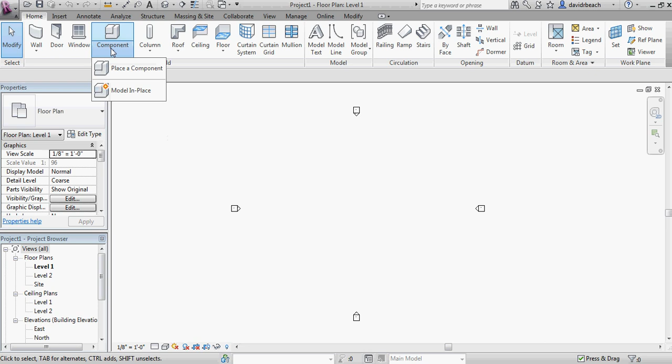Let's just dive into creating a student project that I know about. Rich, this one is for you, buddy. So we're going to start with the component tools, and we're going to go model in place. To start off with, as you're getting comfortable with Revit, let's stick with the generic models, and I'm just going to call this Rich 1.

The first thing that I'm going to do is drop a reference plane, because I'm going to start by actually working off of the foundation on Rich's project. And I'm going to name that reference plane, so I have it selected, and I'm going to name it Foundation.

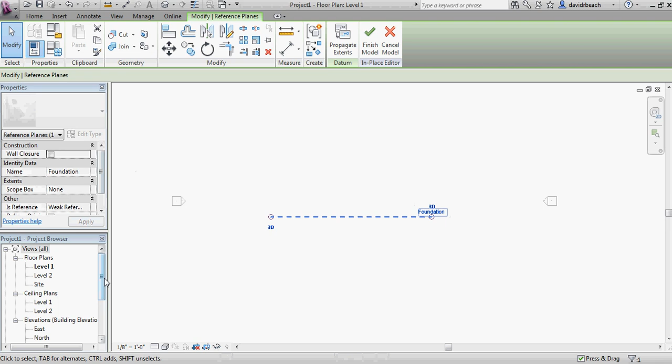You can see that the foundation, as that's clicked, will show up right here. So I'm going to go to my south view, and I'm going to go to Home, Extrusion, and now I'm going to choose the reference plane foundation to begin my sketch.

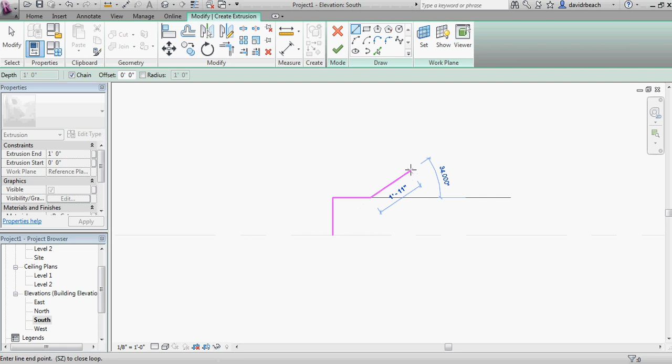So I'm going to go up 18 inches. I'm going to go over 18 inches. I'm going to create a 45-degree angle slope. Let's go a little less than that. Let's do 35. That seems better. 35. Let's make that 2 feet.

I'm going to come down to match that angle. Let's do something like that. And then close this object off and accept it. And in 3D, I'm going to go ahead and pull that out to, let's do 100 feet to start with.

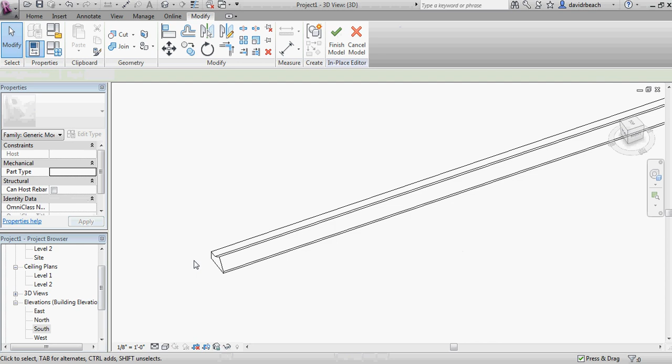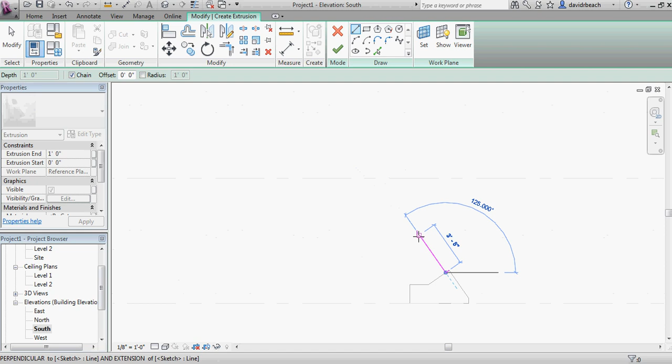So I'm going to go back to the south view again, and let's continue working in that reference plane. This time I'm going to go ahead and make the structural column. Again, I'm going to choose the foundation reference plane. I want to come in about 4 inches from the top. Just need to remember to delete that line later. Let's bring this up 26 feet.

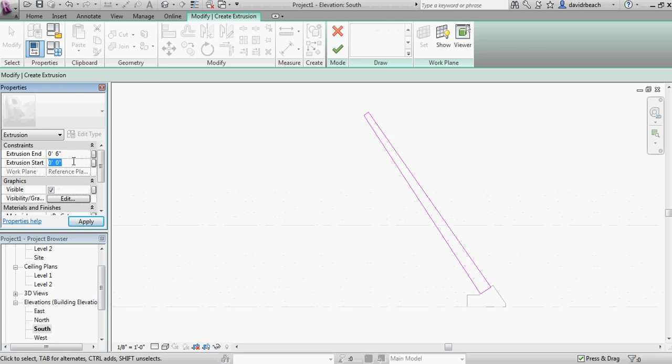And I kind of want to create a tapered look with this. We're going to go about 8 inches here, and then I'm going to close this off at the bottom, and then I'm going to use the trim tool right here to trim that line here, this line here, and we want to make that column about 6 inches wide. And we're just going to say that it's a custom built tube steel type column.

I'm going to go ahead and finish that and look at it in the three-dimensional view. So I have something like that happening. Now what I want is a series of these columns, and then I'm going to build a window, a custom window shape to fit inside of each one, all using the custom components.

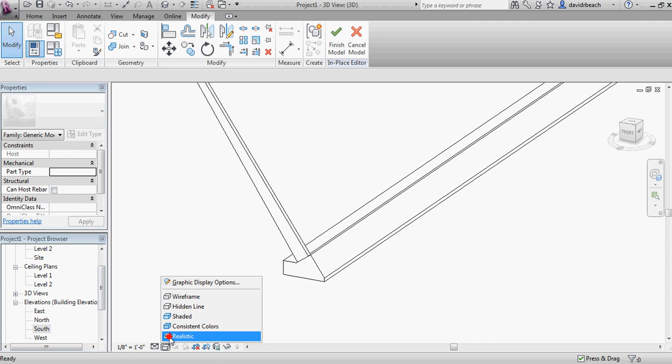Before I get too much further though, let's go ahead and change the view style to realistic, and let's look at some materials as well. So with this custom component selected, I'm going to come down to Materials.

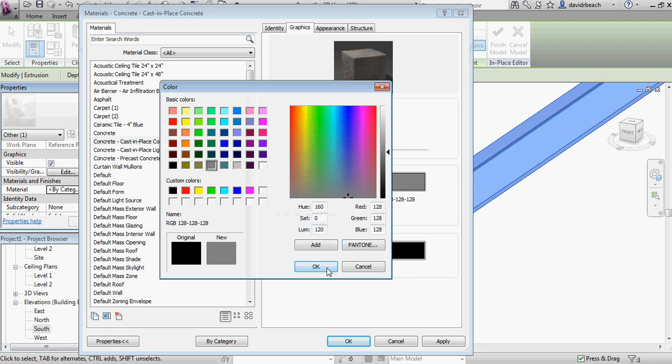And I'm going to go ahead and call that a cast-in-place concrete. And I always want my surface patterns to be gray and my cut patterns to be gray. That way they don't conflict with my line work. So I'm going to do that. Get that kind of look right there.

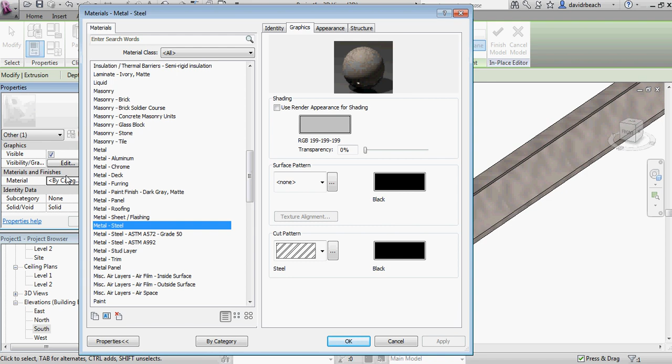And then this steel column is going to be, I don't know, let's figure out a good material for that. We know it's going to be a metal, so I'm really thinking that it's probably sort of has an aluminum look to it probably. That might not be exactly what I want later. I want to check out the steel as well. Yeah, let's stick with sort of a metal aluminum, with the assumption that maybe it's not going to be quite that glossy at the end of the day, but it might have some type of cladding on there that's going to match the aluminum frames for the window.

So the next thing I'm going to do is go to my floor plan view, and I want to copy this column over a couple of times. So I'm going to use the copy tool, multiple, and I'm going to push that over.

And the first thing you'll notice is it's not going to actually go vertically or to the north direction like I want it to. And that's because I built that off of a reference plane, which is represented by this dashed line. So by default, it only wants to move in that reference plane direction.

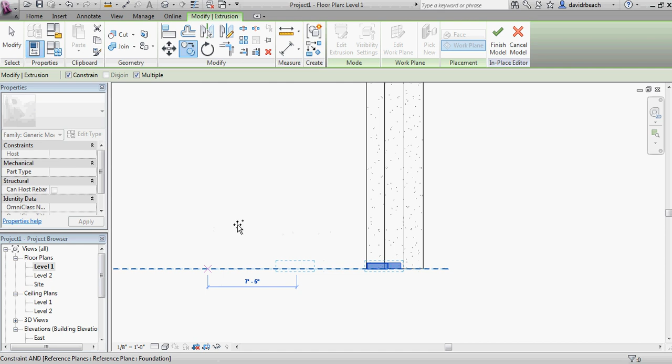So to fix that, I'm going to turn off constrain. That means the object is no longer attached to my reference plane. I can now move that up 10 feet. And let's do that a few more times.

Now, if I was very efficient, I'd be using the array tool. We'll get to the array tool a little bit later. Not in this tutorial, but in a future one. For right now, let's just use copy, multiple.

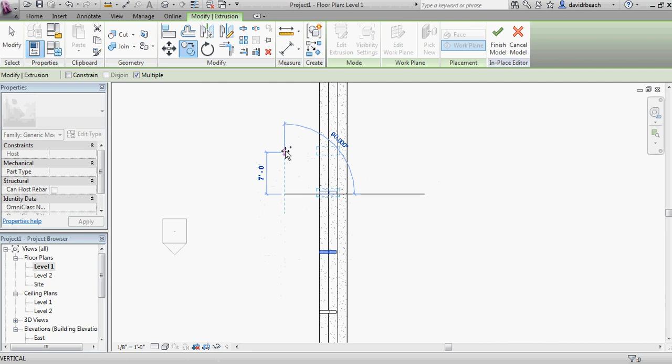So I'm essentially pushing that column in the direction I want it to go, to the north, typing in 10 for my dimension. I should have made 10 copies, and then let's stretch this out that extra 6 inches so the ends line up. I get something like that.

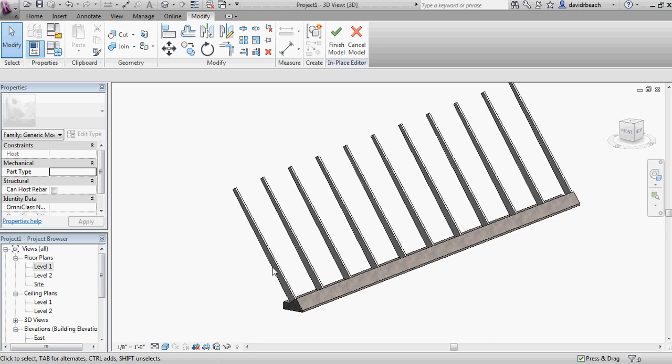Okay, so the next thing I want to do is add in a window. This isn't going to be a very realistic window, but for the purpose of time I'm going to do a quick version that just goes from top to bottom on one of these.

I've been working in a reference plane that lines up right through here, and I actually need to change that reference plane to run parallel to the plane created in these columns.

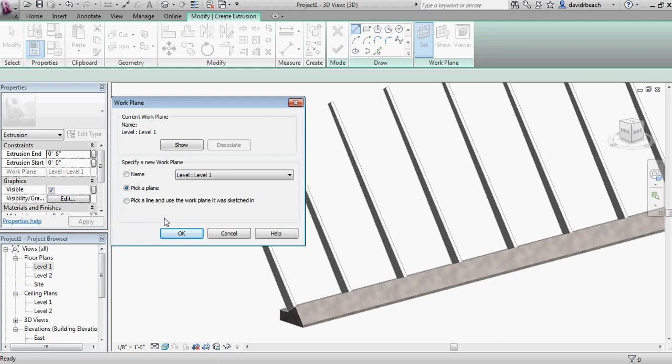So I'm going to go back to Home, Extrusion, and this time I'm going to go Set and pick a plane. With pick a plane, I'm going to use this surface right here, if I can get it to select.

And I'm going to turn on Show so we can see that plane, and I'm also going to turn on Viewer. What Viewer gives me is a square-on view with that plane.

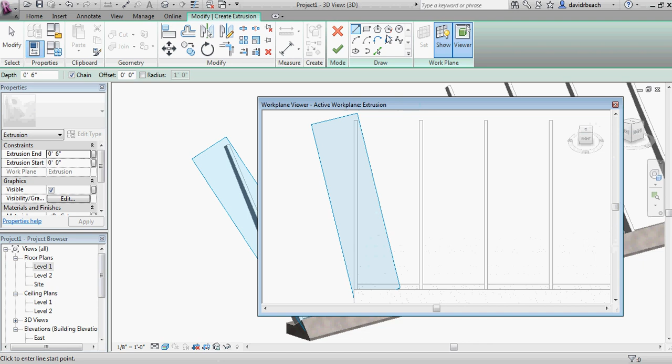I'm actually going to make this window a little larger, because that's really where I want to draw this in. I'm going to start with a rectangle and just go from top to bottom, but I'll remember the rectangle tool doesn't work so well since it's aligning with that plane, which is a little out of whack.

So I'm going to go back just to the line tool, and let's just go edge to edge. Yeah, that's going to be the best way to work that.

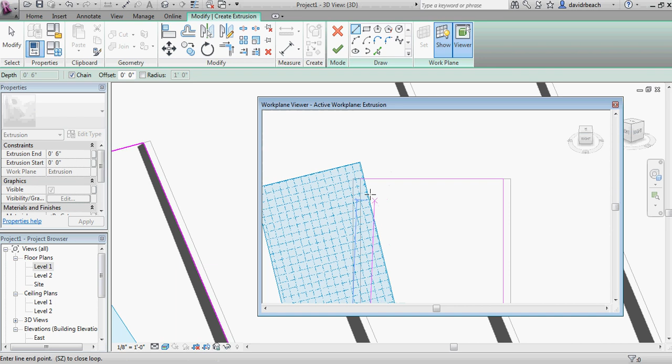Now I'm going to use the offset tool, and let's make a 6-inch thick mullion.

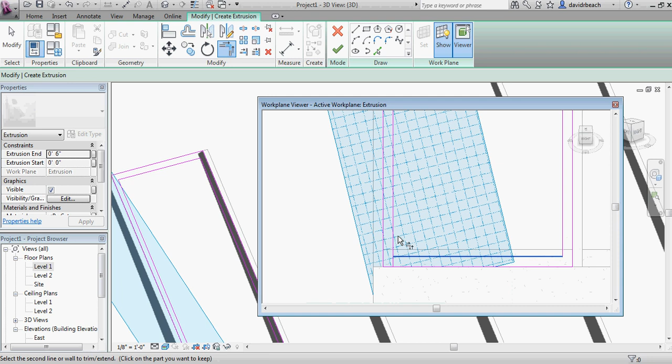Now I'm going to go back and use the trim tool, using the shortcut TR for trim that time. I'm going to go ahead and click OK on that, and let's look at what we have created right here.

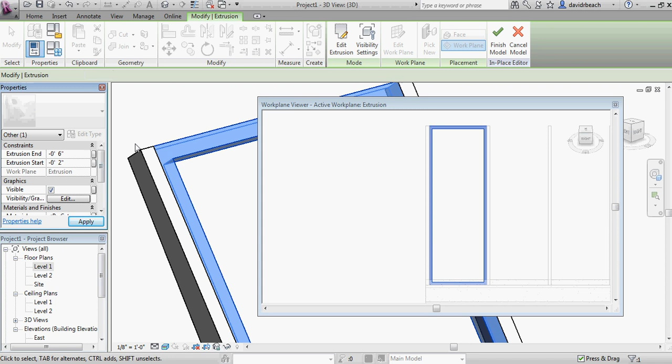You can see that the window frame is actually coming out away from the structure. So I'm going to change the extrusion end to -0.6, and that will push the extrusion back in. I also want to make the beginning of that extrusion -0.2, and that should set the window frame inside of the structure.

Let's select that. I'm going to close this workplane viewer. Take a look at that. So I have something like that happening.

So obviously for a window it would need more mullions, and the mullion depth would probably need to be different, but you'll forgive me for right now on this one. So let's keep working on this though.

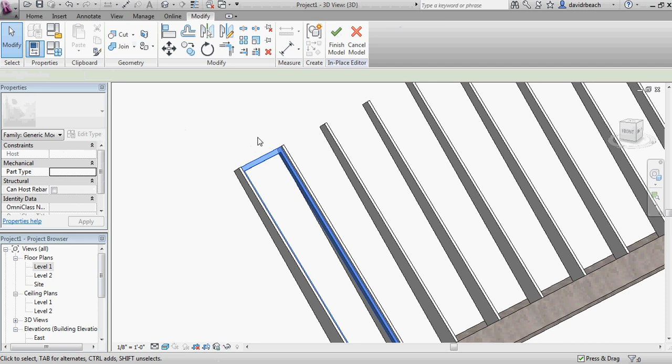We want to go ahead and say Finish Model, and I also want to go back to Edit In-Place. I want to add in one more piece, and that is the glass inside of the window frame.

So I'm going to go ahead and turn on Show again, make sure my reference plane is still in line with the structure. I'm going to turn on Viewer, and let's add one more extrusion in.

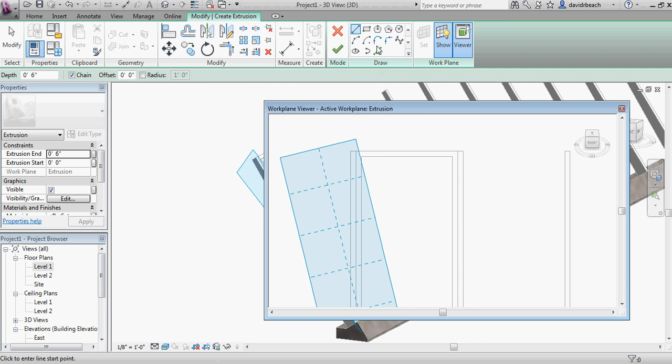This time I'm going to use the Pick Lines tool and just select the inside edge of that mullion, just to save me a few steps in drawing that.

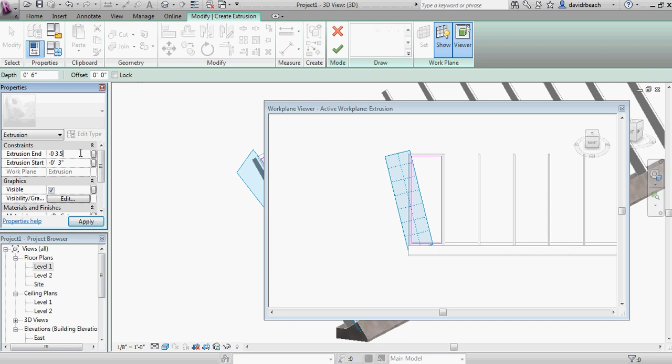And I'm going to say we want the extrusion start to be -0.3, and the extrusion end to be -0.3.5. So we have a 1/2 inch thick piece of glass there essentially.

I'm going to click OK to that, and now I need to set materials for these two. So on the outside, the window mullions, I'm going to select those to be the same as the columns, which was metal aluminum.

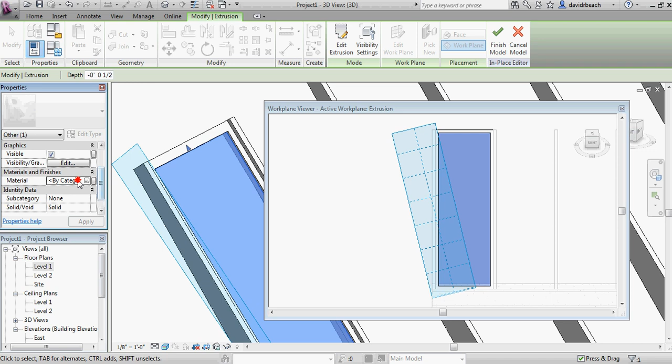And then to the inside, the glass, we are actually going to set that to glass.

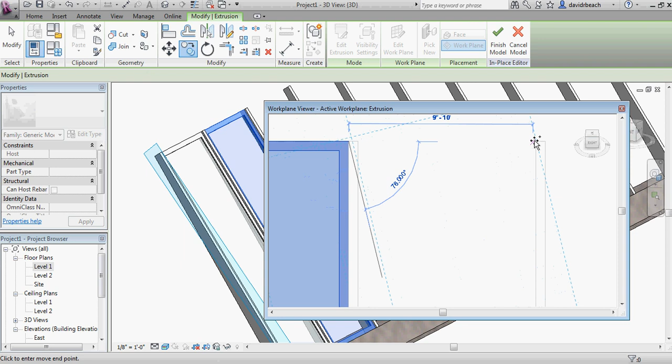Simple enough. Now the last thing I need to do is copy that between each one. So I'm going to do a left lasso across both of those pieces, copy multiple, and now I'm just going to move right across the top to put all of those in place.

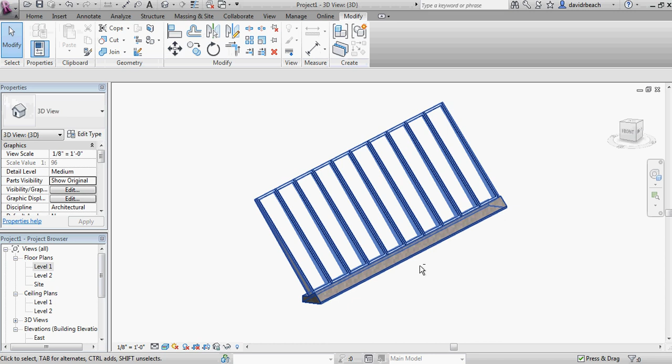I'm going to close my view window, click Finish Model, and I have that part of the design ready to start coming together.

If I looked at this from a perspective view, I would get something like that that's ready to go in terms of exploring the overall form using the custom component tools.